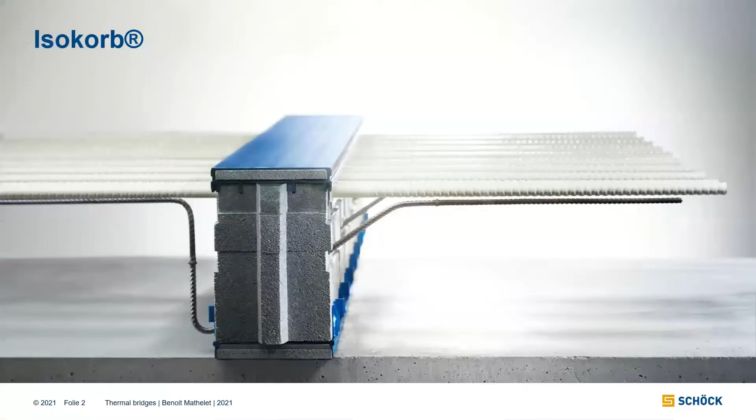So now you're supposed to see a picture of the Isokorb. I'm right? Yes, okay, great.

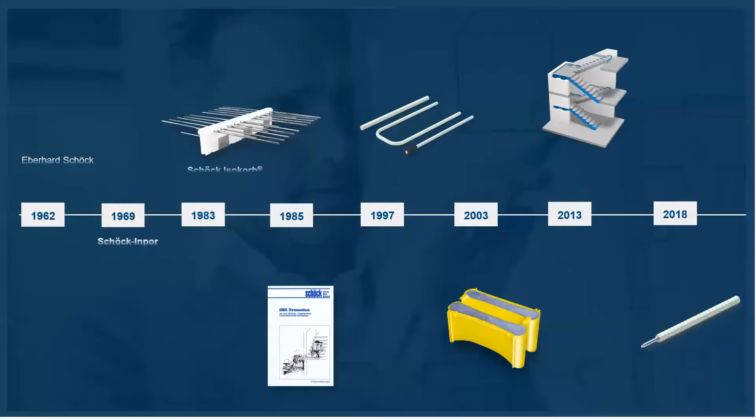Okay, so I'm going to speak very quickly about the company itself because it's not the main point here anyway. I just wanted to say that the company has been created like 60 years ago, and as you can see, we've been developing new products and improving existing products.

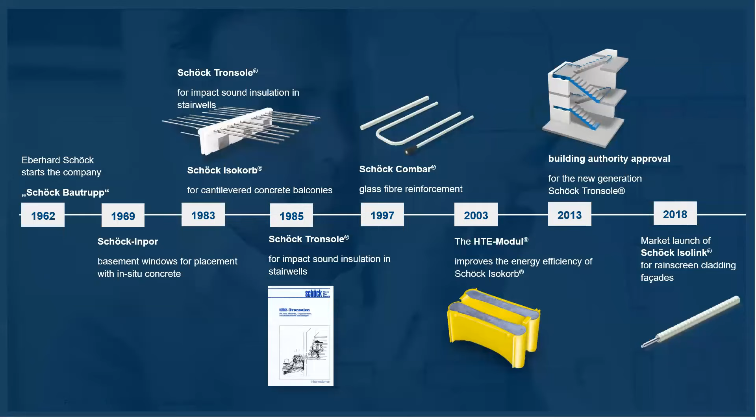Today we have, I would say, basically three different kinds of products: the thermal bridges products, which is why we are here together this evening, the impact sound insulation products, and the reinforcement products.

We do not just offer products, we also have a wide range of services. We can provide the beam files for our products. We also offer software for the design. This software is not really for you guys, it's more for the engineers, but anyway, it's interesting to know that it exists. And something for you, I guess, the detail center on our website, where you will be able to look for details, like how or where the window should be, or how I can achieve the waterproofing on the balcony, and so on. So you will find a lot of information on that.

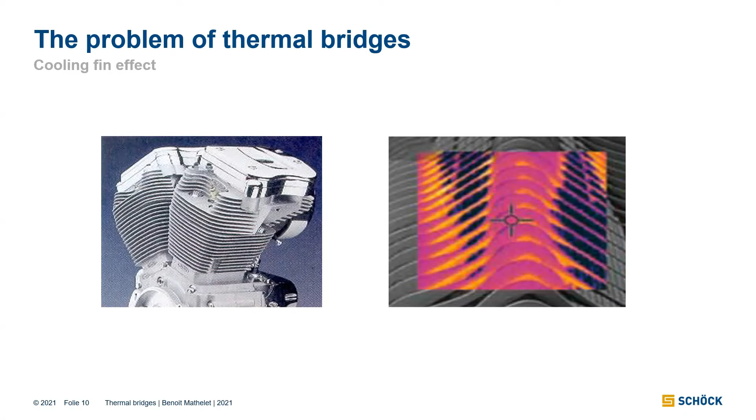Why does it become important to pay attention to thermal bridges? Because, as you know, back in the time, in old buildings, you don't really have this kind of issue.

In a building, the heat will take the route with the smallest resistance, so the route with the biggest thermal conductivity. So for the same balcony, if you increase the thickness of the wall insulation, you will increase the thermal bridge. In other words, in a modern and better insulated building, the thermal bridges will be worse than in the same building but with less insulation.

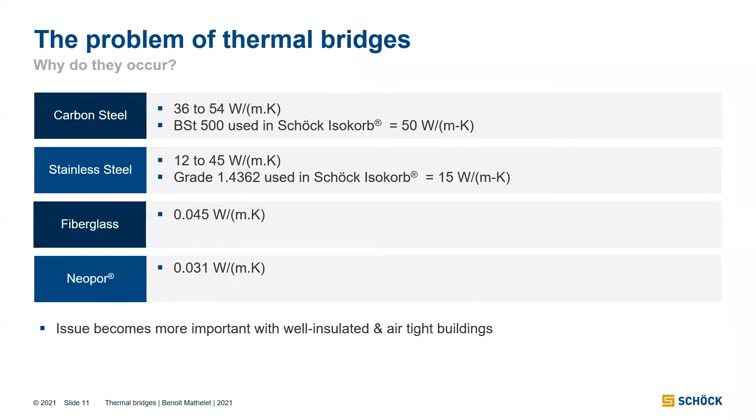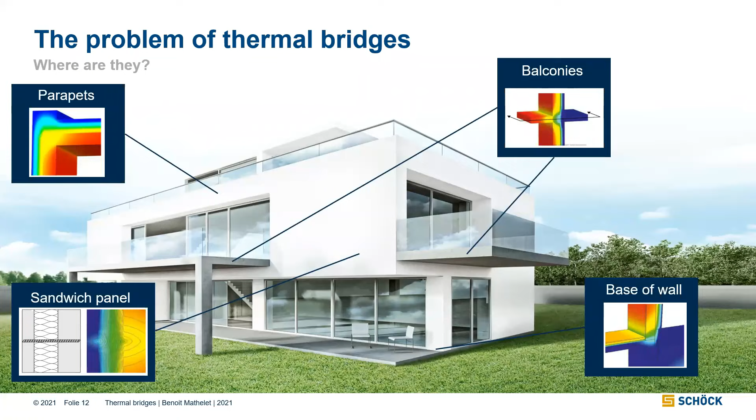Also, let's keep in mind that this kind of issue is based on condensation and mold growth. Again, back in the time, in old buildings, it was not really an issue, because thermal bridges were not really an issue, for what I said a couple of minutes ago. And on top of that, buildings were not airtight, so there were a lot of small holes in the building envelope, and they were pretty well ventilated. Now we try to avoid buildings being over-ventilated, so we usually build airtight buildings and pay a lot of attention to that. The drawback is that the risk of condensation and mold growth increases.

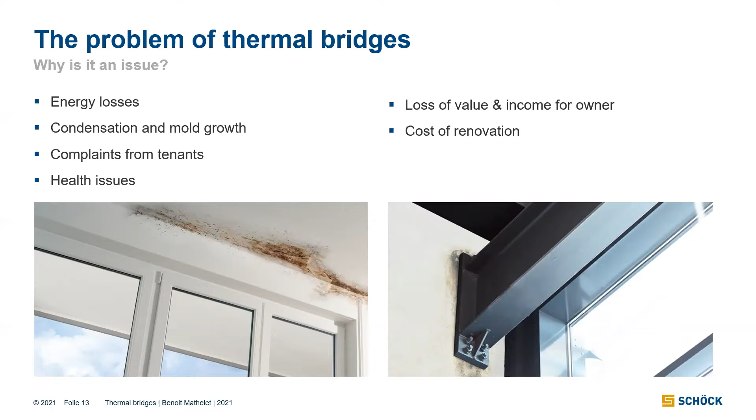So yeah, again, in modern buildings, it becomes a more important issue than before.

Thermal bridges can go up to 20 or 25% of the whole thermal flow. So when you have a lot of balconies, it can be a large part of your energy losses in the building, and this is why it's important to pay attention to that.

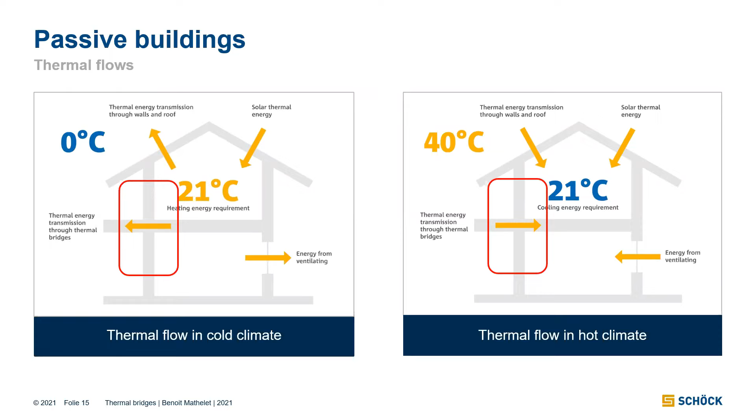The role of a thermal break is to insulate and to support the elements. With elements, here the example is a balcony. That means you don't need any extra insulation around the balcony, and you don't need any extra structural support like a column, because the thermal break will do both. This is what is great with this kind of product.

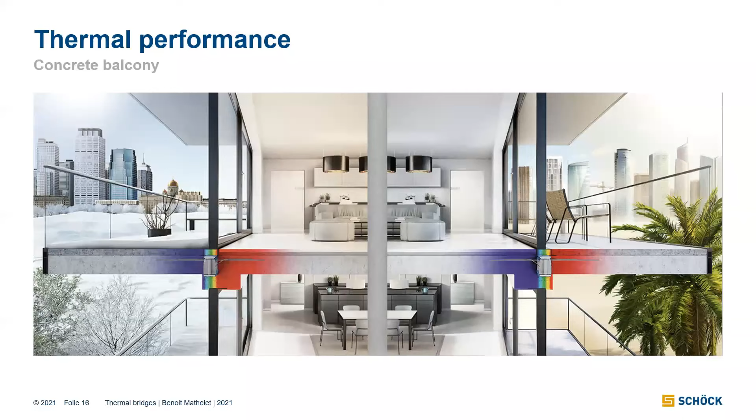I just want to show you a couple of values from a third-party report, made by a company, I guess it was in Canada. They calculated several values. Of course, the value of a thermal bridge depends on the construction, the thicknesses of the slab, the insulation, and a lot of things. There are just a couple of examples, but keep in mind the order of magnitude is similar for other cases.

So we are going to compare what they call conventional construction, so just the balcony, the concrete going through, and then a construction with a thermal break. Note that it's a thermal break with steel rebar, so quite good, but we offer even better products.

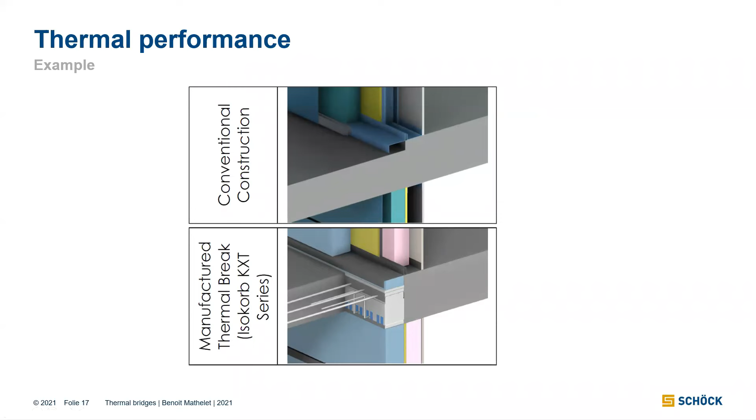Remember, no matter if we are talking about heating or cooling, this is the flow going through the balcony, so that means basically the money flowing through the balcony. As you can see, with the thermal break you can decrease the thermal flow by 5 or 10. It's huge. And of course, it would be still better if we use the product with fiberglass, which we are going to talk about a bit later.

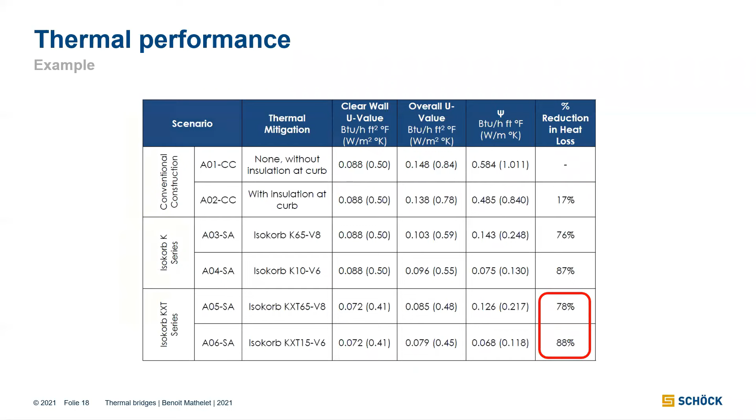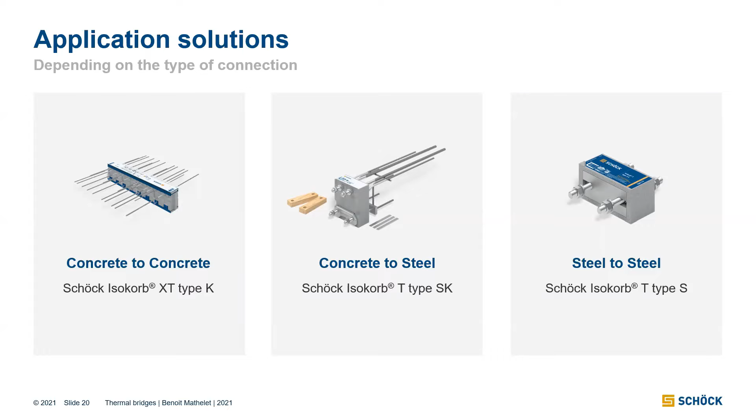This was an example for a concrete balcony attached on the concrete slab. There are thermal breaks for almost every kind of connection: concrete to concrete, concrete to steel. Concrete to steel is typically when you have a sunshade or a steel canopy attached on the concrete slab. We also have steel to steel products, so when you have a steel beam penetrating the building envelope.

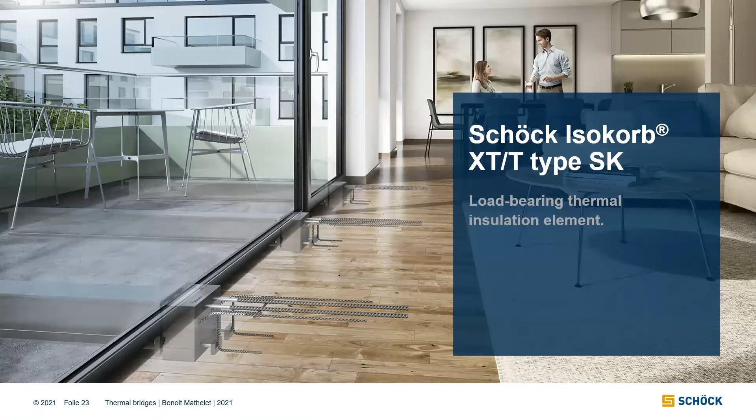We also have some solutions for special cases. So when you have a step between the internal slab and the external slab, we have way more possibilities. I just can't show everything, and it's not the point of this presentation today. If you have any question for any project and you're not sure how you can deal with a thermal bridge, just get in touch with us. Even if you are very soon in the design, we can discuss and provide you a solution.

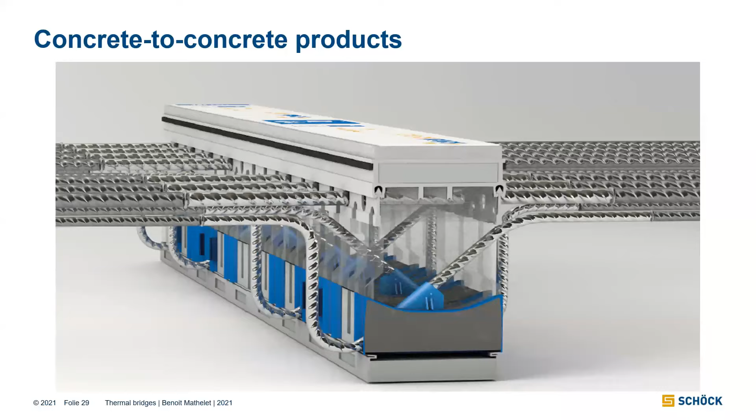Okay, talking a little bit about how does it work. I'm not going to go through all the math, but just keep in mind that the forces are supported by the bars. So you have some bars in tension, the bar at the top and the inclined bar are in tension, and the element at the bottom is in compression. With those three elements, we are able to support the forces from the balcony and bring those forces to the edge of the internal slab.

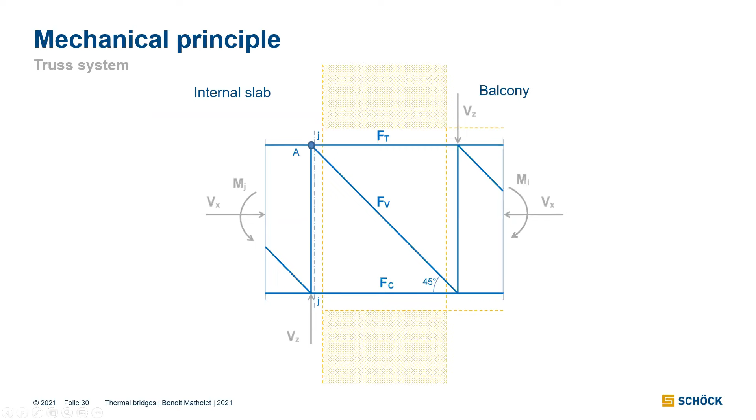So very briefly, which forces does the engineer need to consider for designing the thermal break? So of course, the weight of the balcony, the live loads. With live loads, we mean the people on the balcony and everything which could be on the balcony, but also wind loads, earthquakes, and thermal expansions.

For thermal expansion, this is something which is automatically included in the resistance values we give, so this is not even a question. I think for you guys, it's important to say something about earthquake.

There is, in the Eurocode - the structural building code applied everywhere in Europe and even in some other countries - a chapter in Eurocode 8, the code for earthquake, which explains how to calculate the seismic forces applied on the balcony. It's a very easy calculation, something you can do within a couple of minutes. Then you apply those forces on the balcony and design the thermal break so that it can support them. So this is very, very easy.

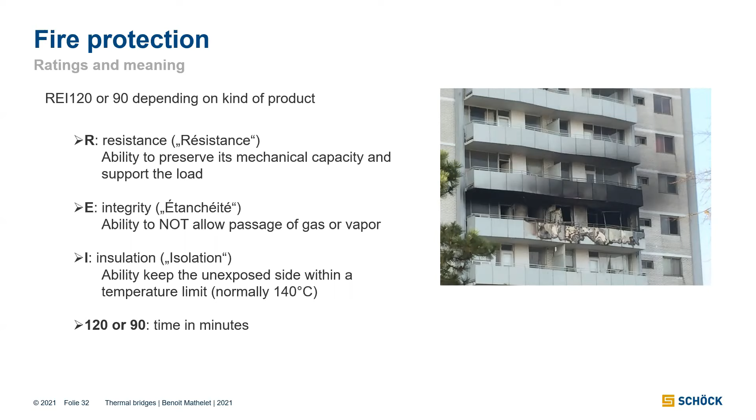So yeah, this was a test for rating. Again, it's been made in some official facilities.

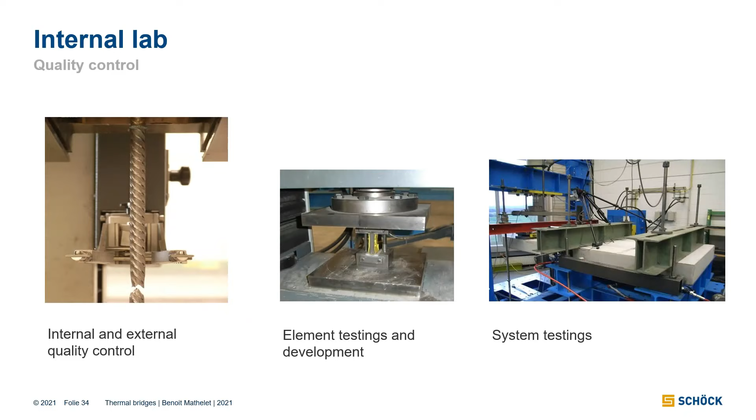Very briefly, just wanted to say that at SCHOECK we are very lucky because we have large testing facilities. We use them for our quality control, because our quality control plan is very strict - it requires testing each welding, each bar. This keeps several people busy full time, definitely. But this testing facility also allows us to make R&D tests in our own lab. It's a certified lab, and we are very proud of that - it makes us able to quickly test and develop new things or improve products very quickly.

Regarding approvals and certificates, we have some approvals and certificates in a lot of countries - in North America, of course, in Europe we have an ETA, but we also have some national approvals in UK, France, Germany, and so on. We have an approval in Russia, and some approvals in Asia, and as I told you, in Japan. And of course, the company is certified in several ISO norms.

So this is very important for you. We have a lot of products which are certified by the Passive House Institute - this is just an example, for our cantilever products with fiberglass. But you can go on the website of the Passive House Institute - we have like 15 or 20 different products rated by the institute. Or you can just ask us, and we will be more than happy to provide you the certificates.

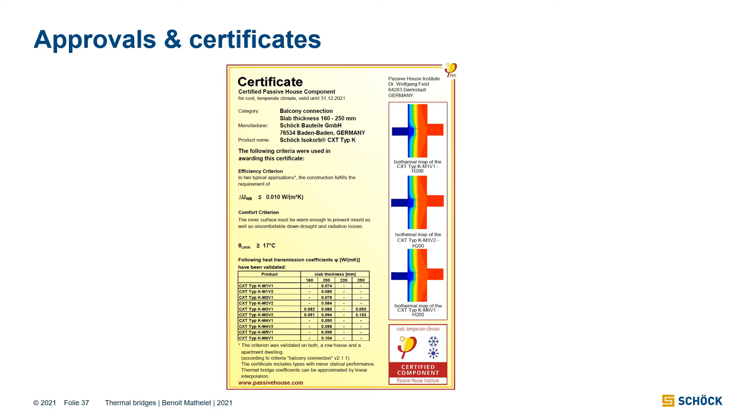So with beam, you mean the horizontal concrete beam, above the window? Yes, exactly, above the window. So well, as you can see, the Isokorb is just in front of this. Yeah, it's in front of the beam. I mean, the bars of the Isokorb are going through the beam, and they are anchored in the beam or in the slab behind. So the Isokorb has exactly the same, let's say, width or height as the slab.

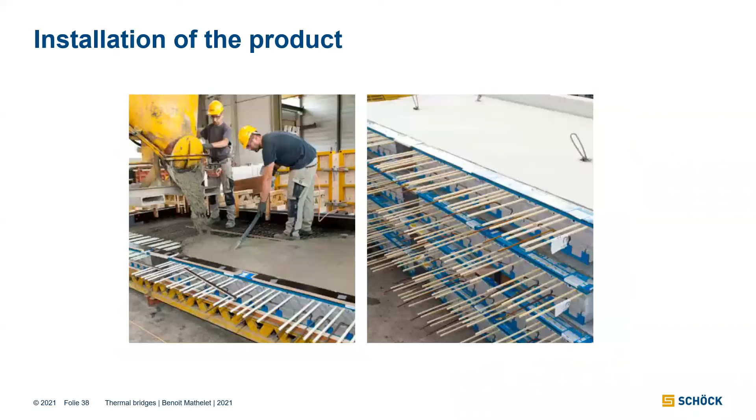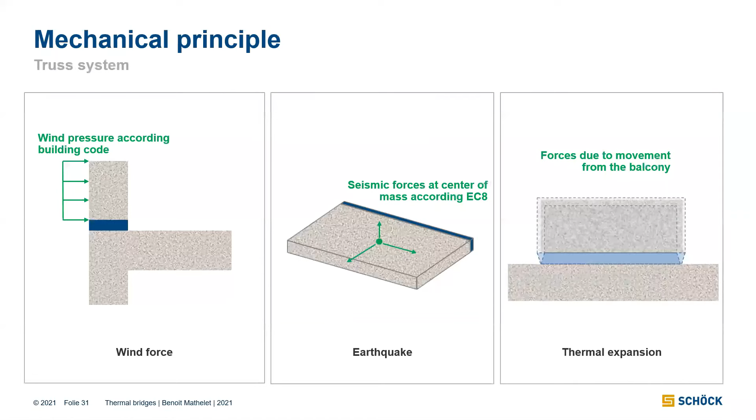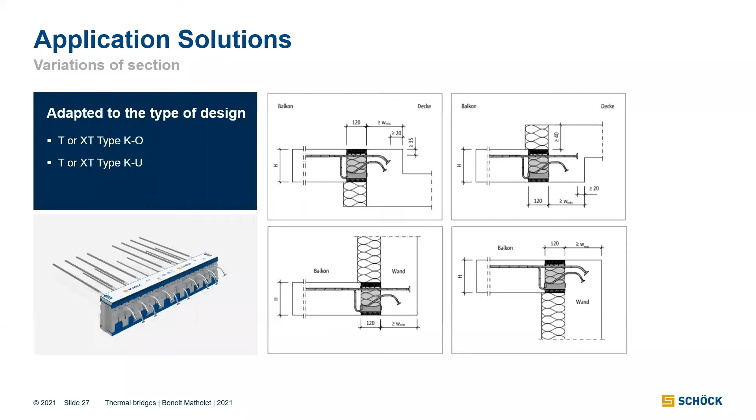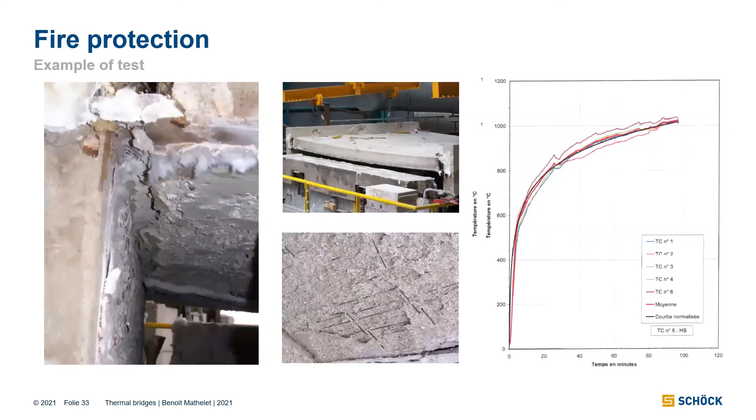But yeah, okay, the ideal case is to be on top of the Isokorb. Exactly, but I know it's not always the case, because there are other challenges when you need to attach a window. So again, this is the ideal case, but you can do something else. So I'm going back on my picture. Does it answer the question? I believe so, yes.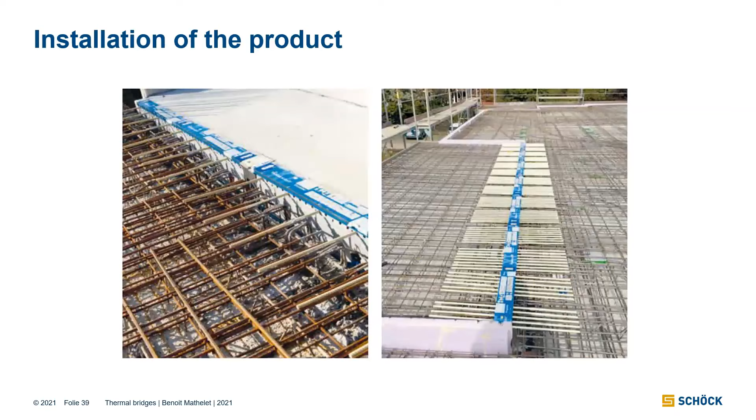There is also one - sorry, but if that beam is perpendicular to the Isokorb, I see here it is this case, exactly this case in this picture on the right. But I see the Isokorb is in front of the beam, and it has the thickness of only the slab - it doesn't have to do anything with the beam. Yeah, because on this picture, just imagine that there will be some insulation glued on the wall on the side of the beam.

So Jonathan says there is a special Isokorb to break the beam as well. Well, when you have a beam penetrating the building envelope, just imagine you would have a beam going from the left to the right, perpendicular to the Isokorb. In this case, we have some Isokorbs for the beam. But a beam supporting the balcony, you mean? Yeah, for instance. But in this picture, you don't need any thermal break for the beam, because the beam is inside - it doesn't go through the insulation. So the beam itself is not a thermal bridge.

No, the beam is not a thermal bridge. The slab is the thermal bridge here, for sure. But when the beam is the thermal bridge, we have a special product for that. It's the same kind of product, with bars that support the forces, just sized to fit the beam.

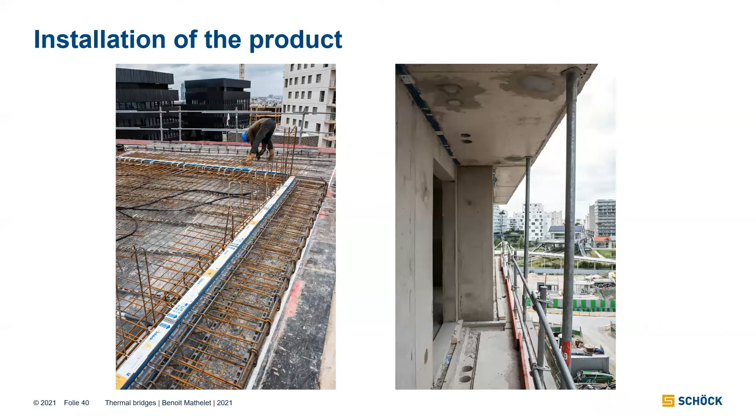So I have some examples. I have thousands of them, but I won't show all of them. This is a project in BC, on the west coast of Canada, which is a highly seismic area. We have balconies with Isokorb up to the penthouse on the last floor.

This is another example in Canada. You don't have concrete walls here, so you cannot see concrete walls, but the principle is the same because you have the Isokorb between the balcony and the internal slab.

We have projects in Africa, in Russia, in Korea, and that's it. I'm not going to show all of them because we don't have much time.

I wanted to talk a little bit about steel-to-steel connections. These are achieved through this kind of thermal break. The principle is the same as for concrete-to-concrete connections: we minimize the area of materials and optimize their thermal conductivity.

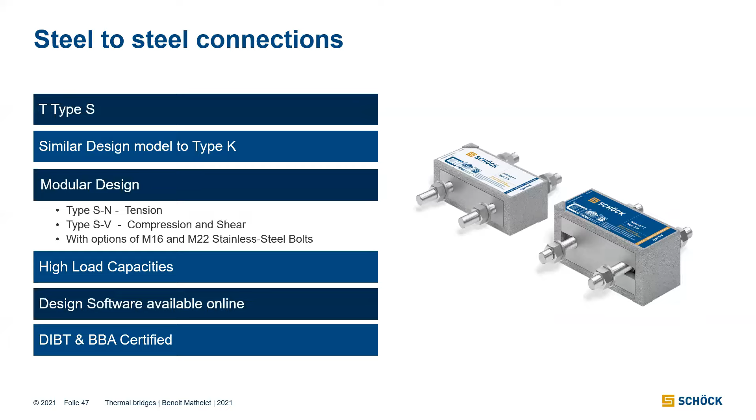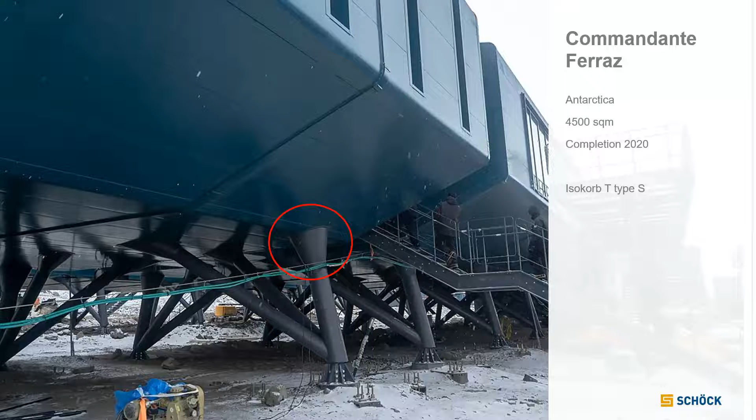I just wanted to point out that we can achieve a lot of different designs and shapes. There's a big flexibility when using this kind of product.

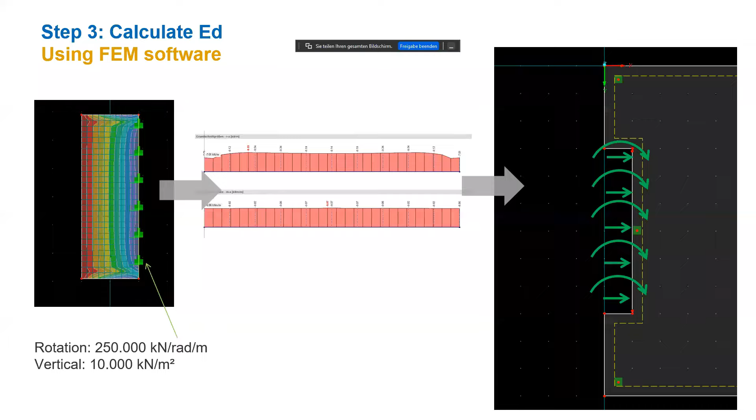If you want to organize a workshop specifically for structural questions, I can do a presentation about how to calculate an Isokorb, going very deep into details, even the equations, and show how we use the technical manual to get the proper reference. This is something we can do. Benoit, we can organize this maybe in autumn, after September or something like that. It will be very interesting, I believe.

Now let's see if someone else wants to make a question. He can take the floor. Or she.

No one? Okay. So, you said before, on a slide with a parapet, that insulating the parapet was maybe more expensive than using your product. This is a bit surprising for us because we also have a lot of parapets. So can you give us some numbers now about costs? What does it cost per running meter, on the parapet or on the balcony, to give us a first view of what we're discussing? Because I believe everybody will ask this question eventually.

I'll answer because Benoit is sitting with me and doesn't hear you, but I heard your question. The cost is difficult to say because we don't know exactly what the situation is. If we have higher forces, a taller parapet, we need the connections spaced closer together. If it's a very short parapet, maybe we can have a connection every meter, and in between we just use an insulation piece. In that case you can save insulation going all the way around the top, side and back of the parapet. So realistically it could be equal. If you have very cheap insulation, maybe the materials are actually cheaper just putting the insulation on. But when you consider the quality of the design and the fact that it's maintenance free with a thermal break - because connections through insulation could lead to leaks and maintenance issues in the future - those are all things to consider.